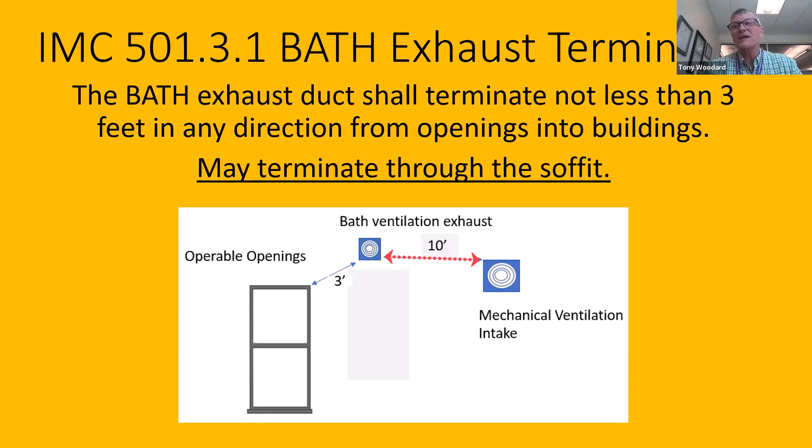The bottom here, they're using a window in the commentary. They show that this is not one of these windows that drops down. This is the bottom sash opening up. Therefore, your 3 foot starts up there, not down here. Yeah. And 10 foot away from your mechanical intakes. That gets tricky in multifamily dwellings. You've got multiple bath exhausts, multiple dryer exhausts, and you're confined in space.

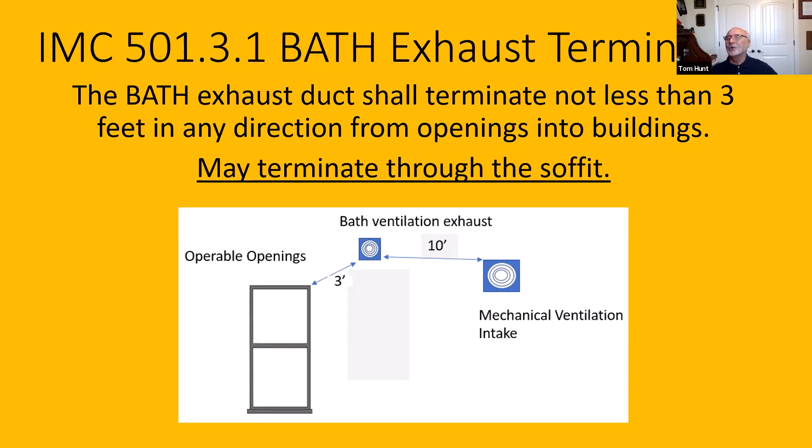This right here above these windows. Now, you might say they never open the window, but the code is there for a reason. And that's a little too close. But like I said, this was permitted prior to our new code. We're wanting the architect design guys to try to watch out for this, because the heat and air guy will just start running. Well, that's where they showed to put it out. And we're wanting to educate the heat and air contractor. Be careful of that. Get your 3 foot. Try to picture your 3 foot away from any part of that window, so you'll be okay.

One of the things that I thought was important about this is that we think that the plans that we might get on a project this large would be okay. But, as a heat and air conditioning contractor, you're responsible for making sure that it, in fact, truly is okay, to be able to confer back with the engineer and back with the general to say, hey, this might not work. Maybe we should check this thing out.

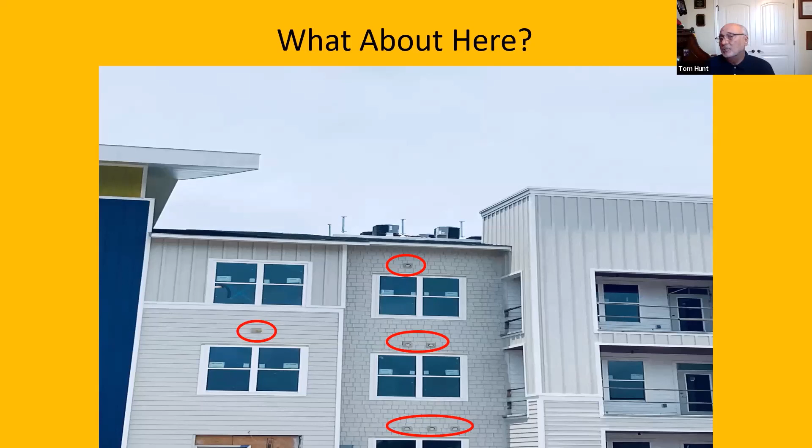And again, I think it's important for a contractor to understand that just because the plans say it's okay, he still has a role in making sure that somebody did not make a mistake. Because a lot of changes happen from time to time. And when you get there and you start putting the system in, you got to say, hey, wait just a minute, this might not be right. And if you don't know, next thing you know, you put it in wrong, and then you're responsible for changes. Yeah. And that's getting expensive in a hurry right there. Yeah, it does, doesn't it?

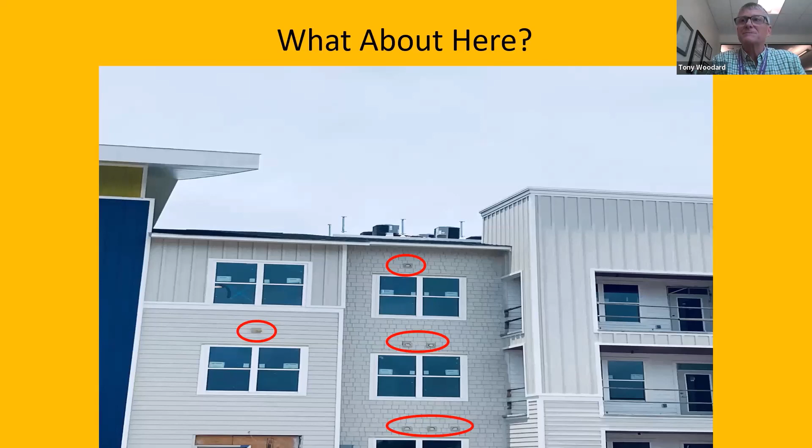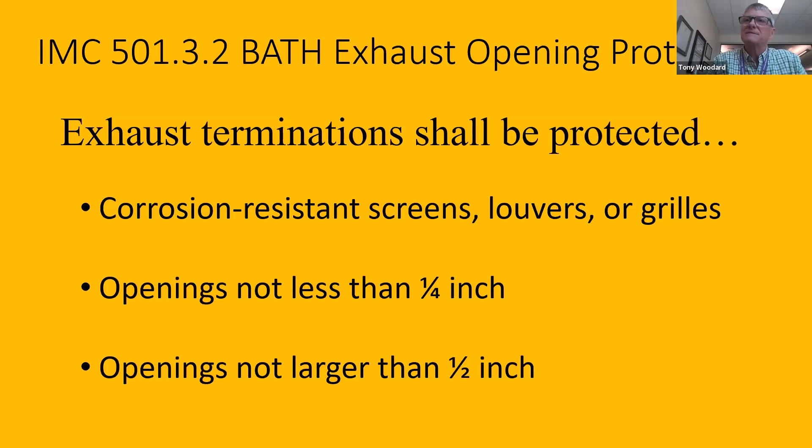Yes. Here we go from, again, just like it is on residential. So our guys should know that pretty well. Yes, sir. That bind-in cap should be coming that way. Yeah. So now we're to dryer exhaust. Dryer exhaust, they will allow that 3 foot. Now, you can't put a dryer in a soffit. You can put it high in the wall, down low. You can put it up on a roof pitch, gable end. Mhm. That 3 foot, they will allow that.

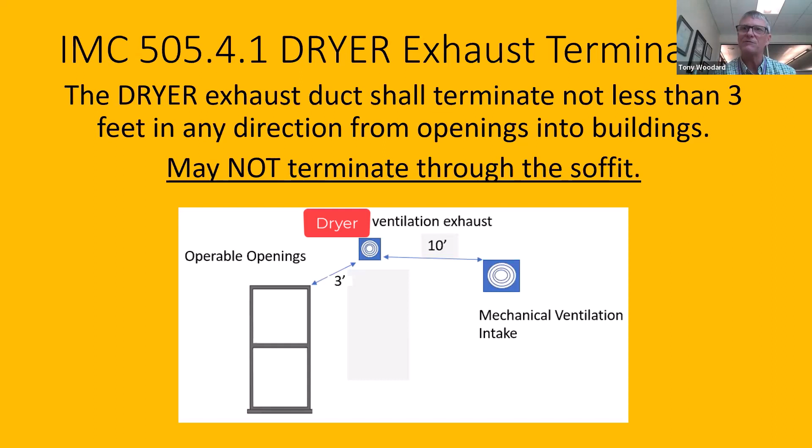And in the mechanical ventilation intake, sometimes on, that's another, never mind. Go ahead. Well, I notice here on this screen that it says bath ventilation exhaust here, but we're really talking about dryer, but it's similar. It's just like bath, except for the fact that you cannot terminate through the soffit. Did I just say that right? Bath exhaust can terminate through the soffit. Your fresh air intake can come in through the soffit, and bath exhaust can go through the soffit with a termination kit. It can't just go, it's got an approved kit. Dryer exhaust cannot. Gotcha.

Okay, so here are 4 items that maybe we just take them one at a time, Tony. Yes, so the exhaust on the kitchen, that needs to be metal. That's metal on the kitchen. That's because that is a minimum 28 gauge. That starts at just your single family dwelling, and then you go up in gauge based on your occupancy. You get to an R2 townhouse, if you decide to put an exhaust system, now you're bumping up to 26 gauge. This is in your fire code.

So the next one over, the class 1 flexible bath exhaust, this is flex connector, not flex duct. A gentleman asked me, well, can I run flex duct 25 foot since the flex connector is only allowed to be run 14 foot? You can use an actual flex duct rated with the insulation and all that. You can't pull the liner out of it, but if you want to run an insulated flex duct as your bath exhaust, you can. Now, it's got to meet the requirements per ADC. It has to be supported every 4 foot. When you make a turn, it's going to have to be on a hard mechanical 90. It'll have to have the approved connectors on it, when you pull the flexible, then you pull the insulation back and seal it up.

Those 14-foot runs is what's getting everybody. That's what we're seeing. They're running that flex, that class 1, I think it might come in a 50-foot roll, and they'll run that thing over. That is 14-foot maximum. So if you're not going to terminate within 14 foot, you're going to be metal, and you have to be metal where you're never going to be able to see it. You got a picture in the construction phase. Is this going to get covered up with sheetrock in the wall? Is it going to be covered up by insulation? At that point, that is always metal.

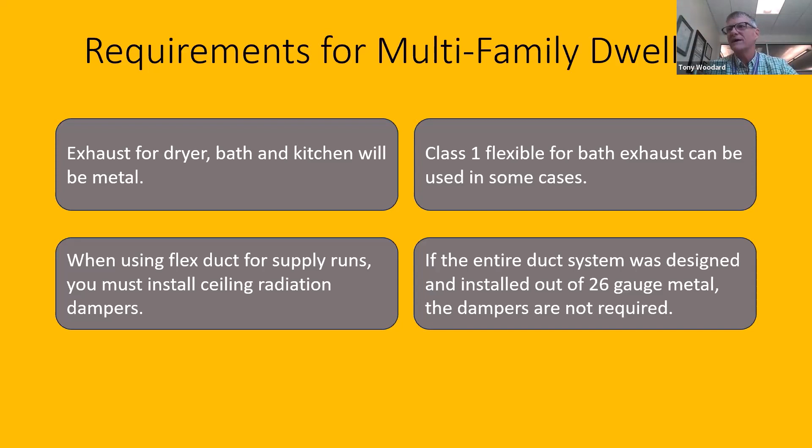Now, this is something for a residential guy like myself, I don't know anything about. Okay. So what he's looking at, you've got your radiation dampers too. You got your square, you got your round. Now, those are actually in line we can put in, but they sell a kit that fits. Right now, what you're seeing, a lot of the contractors are buying the actual insulated boot with the radiation damper already in it, manufactured that way.

That is when you picture your first and second, if you got a 3-story building, you got your first floor, your second floor, you've got your plenum in your mechanical room, and then they're coming up and they're not hard piping with a branch run to the register, to the boot. They're coming up with their plenum, they're using takeoffs, then they're using flexible and dropping down to a 90 or into that boot.

That smoke damper, radiation damper, if you use that flex connector, you got to put the radiation damper in there because there's occupants above you. It can burn through and cause the fire to go between the horizontal assembly this way. If you hard pipe it, the fire is going to stay in there well long enough for occupants to leave the building. Flex duct will melt immediately.

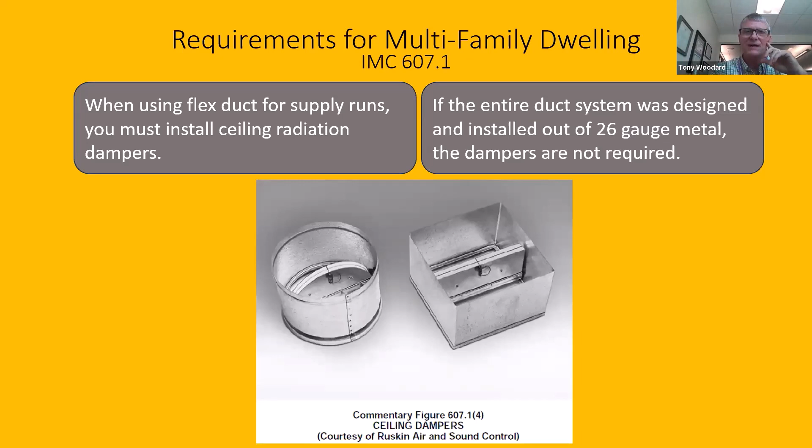So the fire damper stops the vortex from swinging through, is what it does. You get a hole here and you get a hole up there. So that's required if you use the flexible connector, first and second floor. You get to the third floor in the attic, it's kind of a different animal. Here are 5 items that it talks about here. Fire dampers at vertical openings.

And there's your 26. The duct shall be contained, located, cavity shall be constructed at 26 gauge. That's the damper. That's the outside part of it. The duct opening into a one dwelling unit, sleeping unit, you can't do that. You can't go from, well, I'm sorry, they're talking about it's going to be continuous. You're not going to separate it like we were trying to show.

When you exceed the 4-inch or the 100 square inches, there's a thing about that, and that's really based on, picture yourself staying at a bed and breakfast, and all of a sudden we went in there and we decided we're going to do bath exhaust from here. They're talking about there's certain openings. When we penetrate that horizontal assembly, we're not going to have anything more than 100 square inches. We can't exceed certain things, even if we tried to use a Hilti rated fire assembly. And the annular space protected by the passage of flame, again, that's going into the rating.

And then this part in 717, that's really geared again for commercial. Yeah, that's more geared for your commercial. But we have these occupancies that are commercial that's confusing. So take a senior assisted living where they're ambulatory people. They just don't have all the faculties to maybe take care of their medicine or so. So we have somebody that watches them, but yet they have their own dwelling they live in. There's certain things with the fire code that upscales and trumps what we do.

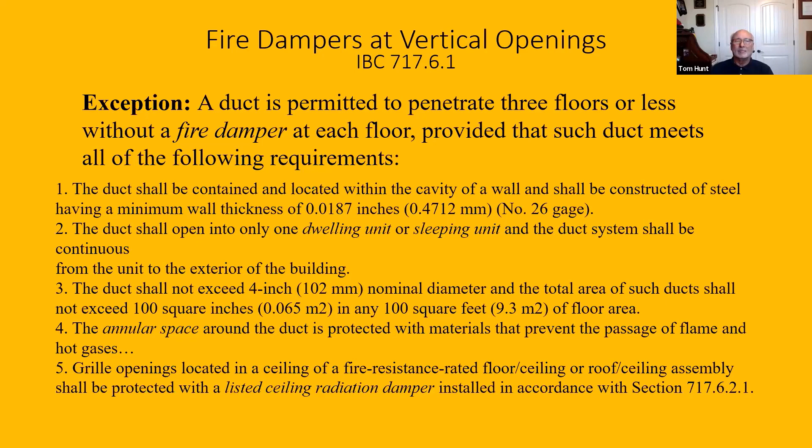Well, one of the things as we look at this here and we move on, that I think is important, and the one thing that I was hoping we would accomplish, is that we would show enough code and enough pictures from the commentary for people like me, residential, very, very light commercial, to say, hey, you know what? Maybe I ought to not be quite so brave as to jump into something that's commercial when I really know residential well.

I need to stay in my own ballpark, or I need to make sure that I fully understand code and that I'm dealing directly with the engineer, because in cases like this, your engineer is your friend. Yeah, they are. And that's a good picture there you're talking about, when you can see some of these townhouses where the bottom floor's got a garage and they utilize part of the garage, and then they build what you might think is an extended plenum per se, to go up, trunk off, go up to the second floor and come down. And that's a good illustration of what we're doing there.

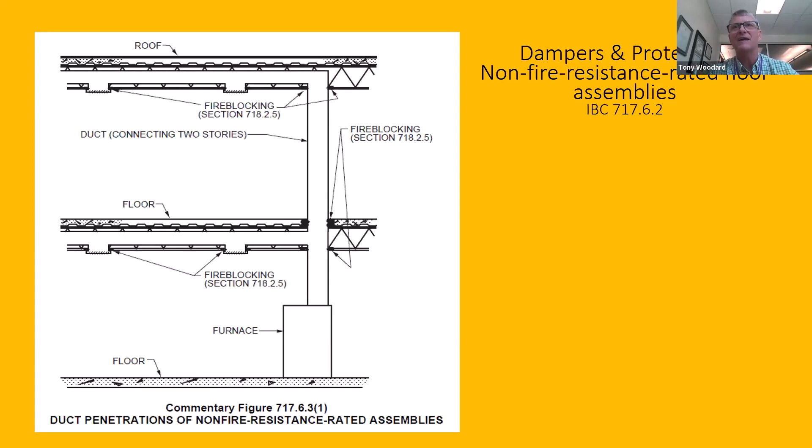Right. I just took some good pictures. We have a brand new inspector in the Northeast, Kerry Baker. They had to set all of the condensers on one end of the building and go through 3 apartments. There is a rated Hilti assembly. It's a canister. You go through that fire rated assembly, the line sets go through it. The hotter this thing gets, it seals completely off. The copper can melt away. This thing seals up and seals it.

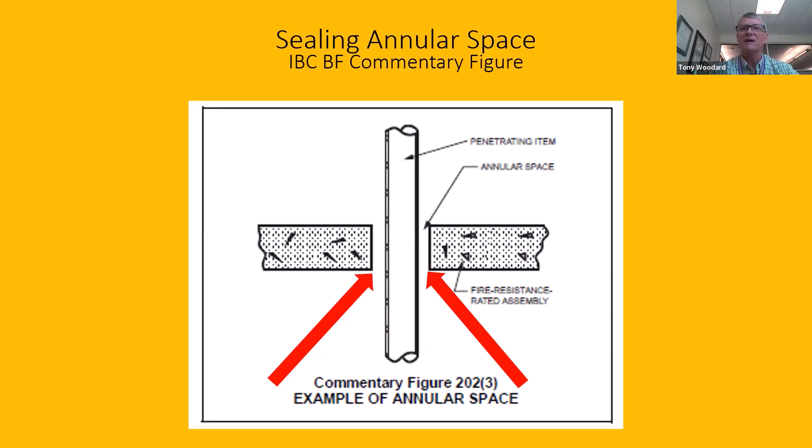That is what's required. And guys and gals, you've got to get that approved on the front end. Get with your architect, get with your engineer, get with your fire marshal, and get that approved on the front end. They're about $289 a canister for the ones we were looking at. I'm sorry, I laughed at that because I just thought, what if you don't know and you bid the job and all of a sudden you show up and you got a $289 canister? I mean, there's a fix, but you need a fat wallet.

Right. This was an interesting one to me in that it says that if you have an exhaust air plenum that has the capacity of handling 2,000 cubic feet per minute, you need a duct smoke detection system. Is that only true for commercial? Yes, that's only true for commercial. We don't, because we have the new requirements now with the smoke shutdown, and actually now you don't have to have gas in your home. If you put in a home that has an attached garage, you have to have the combo carbon monoxide smoke detector. We have the alarms in place to notify the occupants to get out.

And we typically have enough egress, even if, say, we design a house that's 3,000 square foot and we can do a 5-ton system in it. We've got 3 exits, multiple exits most of the time. By fire code, the bedrooms have to have egressable windows, meaning operable windows, ways out. There are certain areas in commercial where you might have a long exit travel distance that's over 50 feet before you get to your exit. That's why we don't want to pull the smoke in the direction that you have to exit if the fire's behind you. So that's the criteria with the smoke shutdown and 2,000 CFM or larger.

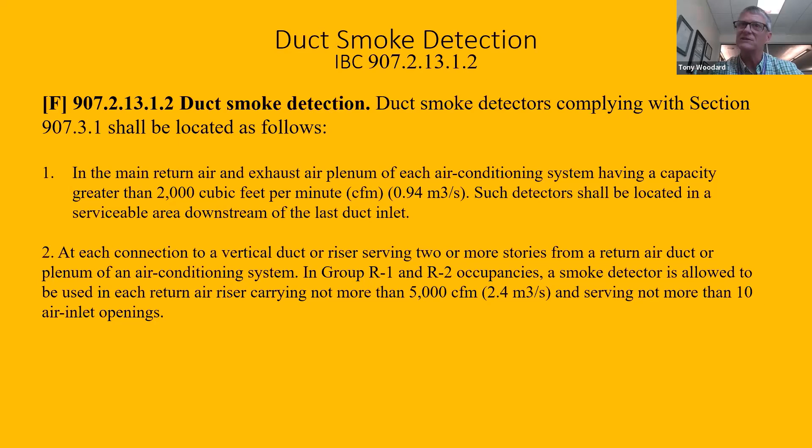You think we'll ever go to that in residential? Yes, I do. And I'm going to tell you what's going to kick that in: A2L. We are about to start monitoring single family dwellings just for the fact the refrigerant is flammable enough. You're going to start seeing monitors high and low, and we're going to start seeing shutdown devices on residential. That's coming. Welcome to a new world, huh? Yes, sir. Let me see here if I can show this picture.

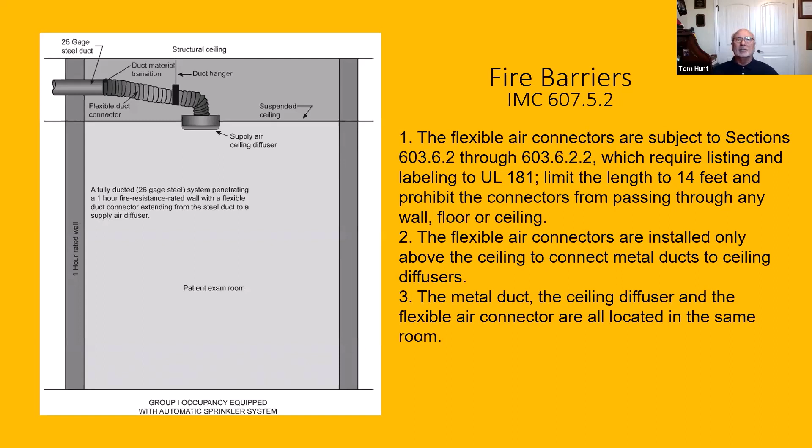It shows kind of what you were talking about a few minutes ago, coming to a firewall with metal and then being able to transition to flexible if you're in a commercial application. Right. And then you would have that ceiling boot. That's a good picture right there. That ceiling boot has that radiation damper. It's a butterfly. When the clamp melts, it shuts down or comes this way, however you want to look at it. It's up there like that. It'll open up at that 180 degrees or 148, 160, whatever fuse link's on the one you have.

That's exactly a good picture showing like a flex connector. Now, that right there, if that is a true flex connector, not flex duct, that would only be allowed in a plenum rated above ceiling condition. That's not allowed if you're not treating it. That has to be flex duct, meaning it would be the vapor barrier and the insulation all in one.

The flex connector is what we see at the old Pulaski Tech and the hospitals where we have a plenum rated ceiling above. We're conditioning that air. The flex connector feeds a main trunk line that's going through, and you hit your little thermostat and the VAV opens up and treats that room. That's where you mainly see that. Correct. I see. All right.

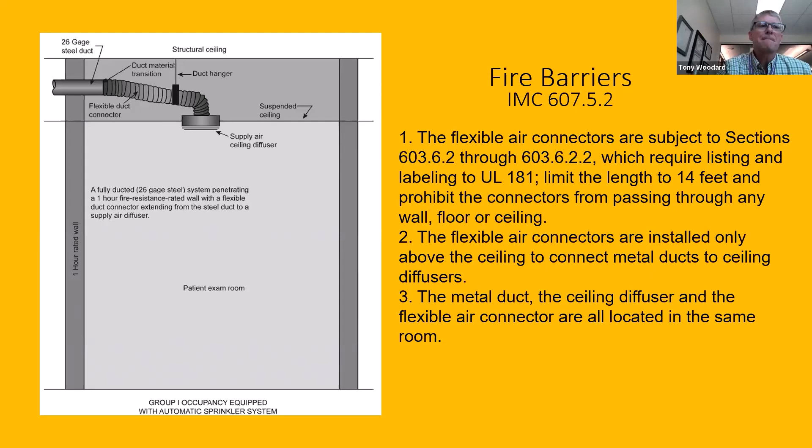Anyway, the one thing I like about the PDF is that when you download it to your computer, you can then search on your computer, and that makes it a little bit easier. But if you need to carry it in your truck, you need that soft cover. Yeah, that search, just key in a word and it pulls it up. That's handy. But you got to have it with you too when you're in the field out there, and we carry the ones in the truck.